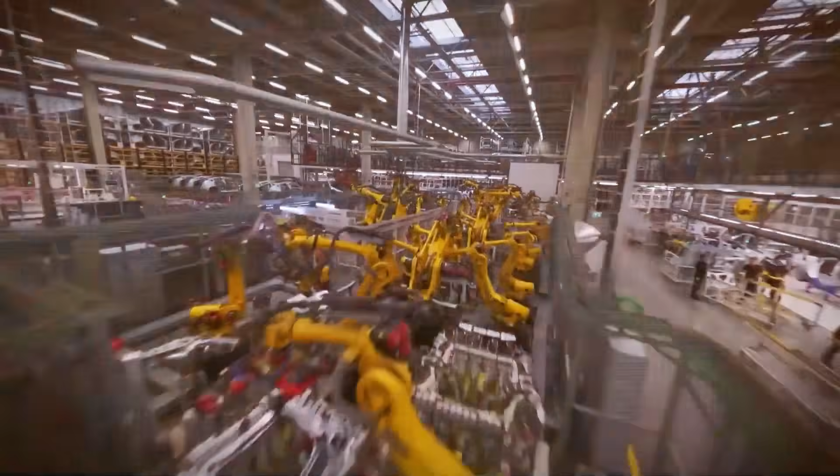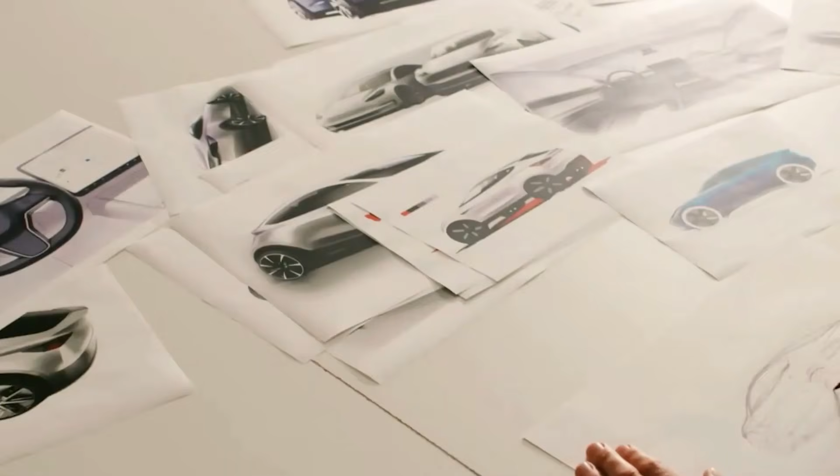It's late 2025. The legacy giants are bleeding billions, desperately trying to copy the Tesla of yesterday. They're tracing blueprints for an engine that doesn't matter anymore. Because while they were fighting for market share, Elon Musk wasn't just building a better car. He was building a machine to end the concept of a car company entirely.

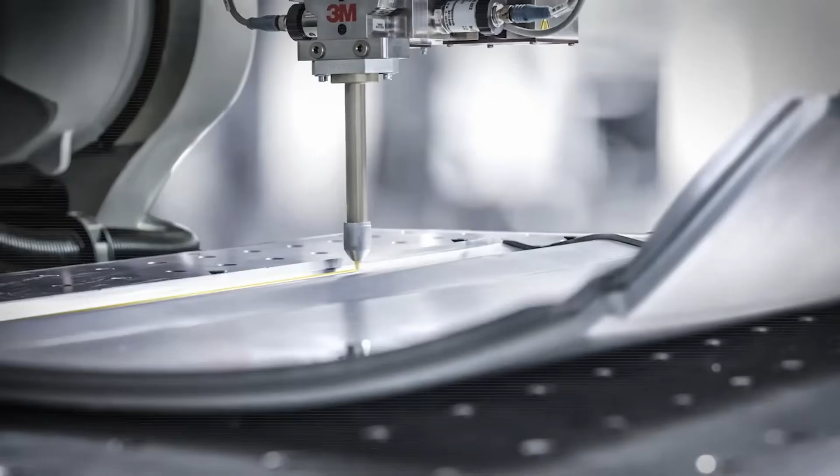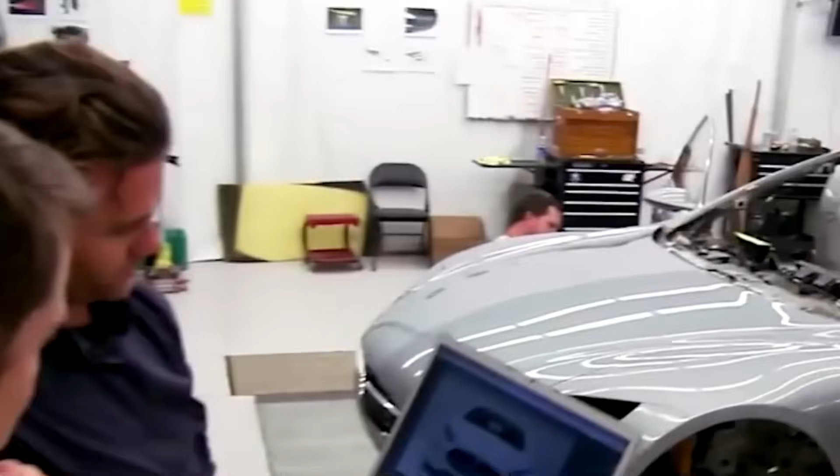We aren't talking about transportation anymore. We are talking about the total rewiring of reality. Labor, energy, the very physics of how things are made. 5 hidden technologies, 5 keys to a kingdom the competition can't even see yet. This isn't an update. This is an extinction event for the old guard. You want to survive the shift? You need to understand the blueprint.

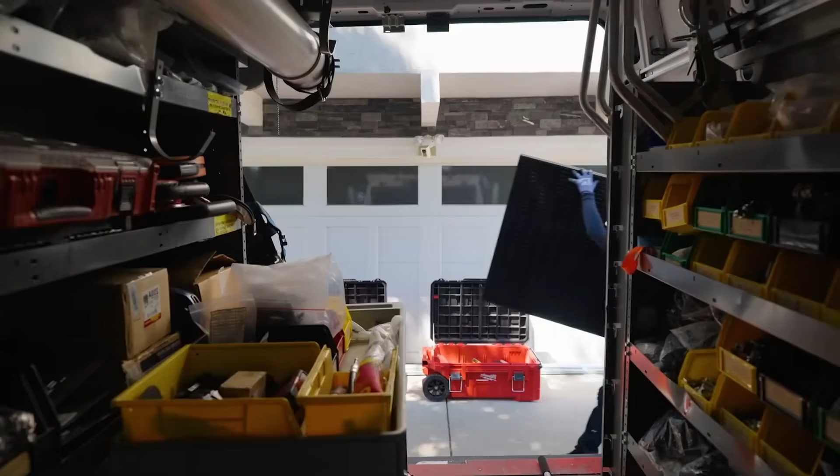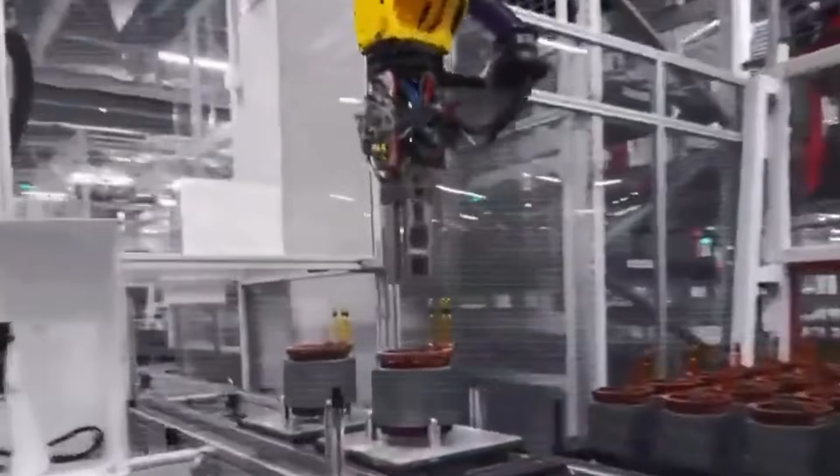Let's open the box. The playbook has 5 moves, each one a checkmate. First, the unboxed process, tearing down the century-old assembly line. Second, 48-volt architecture, a nervous system reboot. Third, the 4680 cell, the key to mass market mastery.

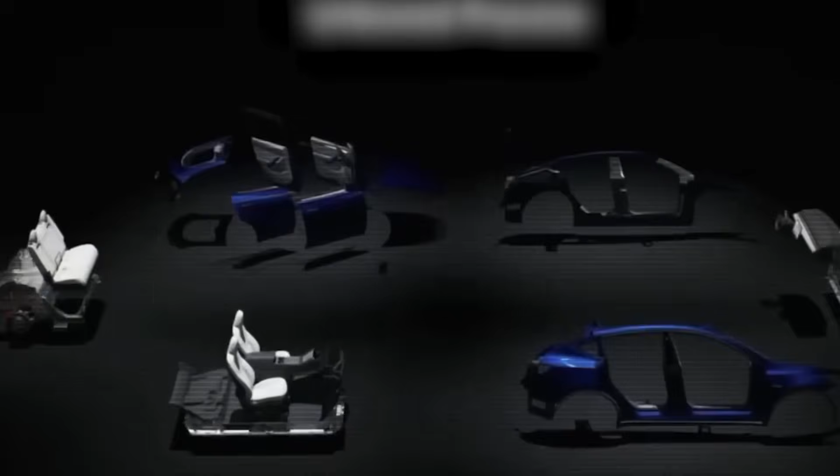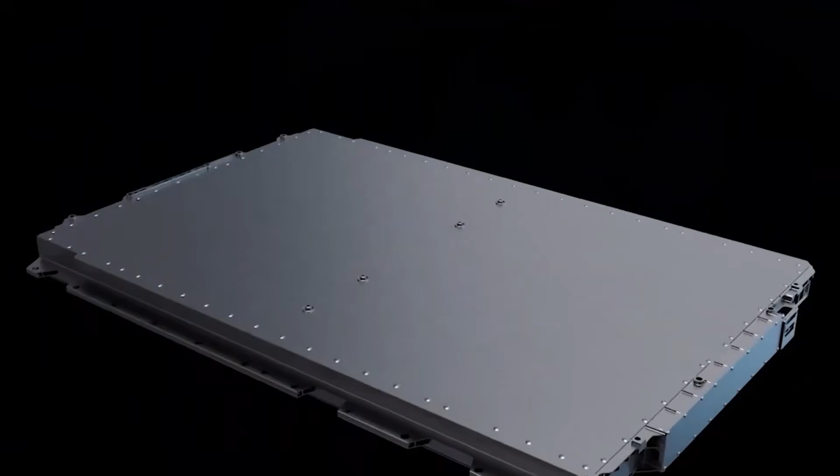Fourth, end-to-end AI, the brain that finally unlocks the robotaxi. And fifth, Optimus, the humanoid that takes that intelligence and learns to walk. Alone, they disrupt. Together, they dominate. A fortress built to secure an insurmountable lead. Today, we deconstruct the stack. How it works, why it matters, and how this convergence changes everything.

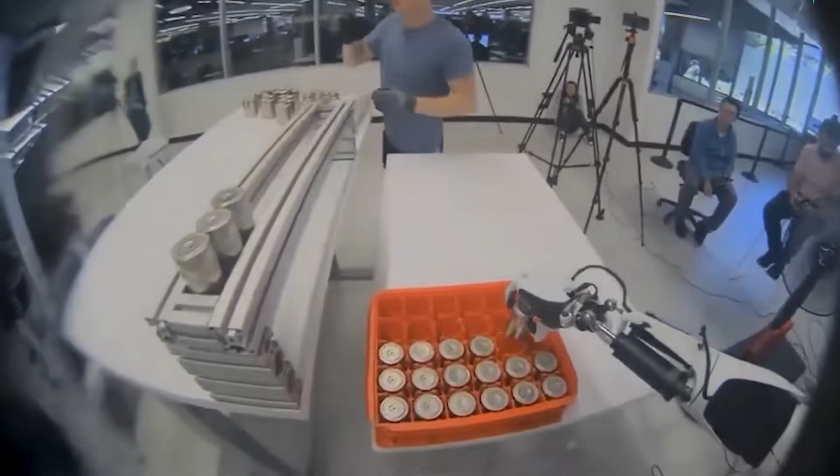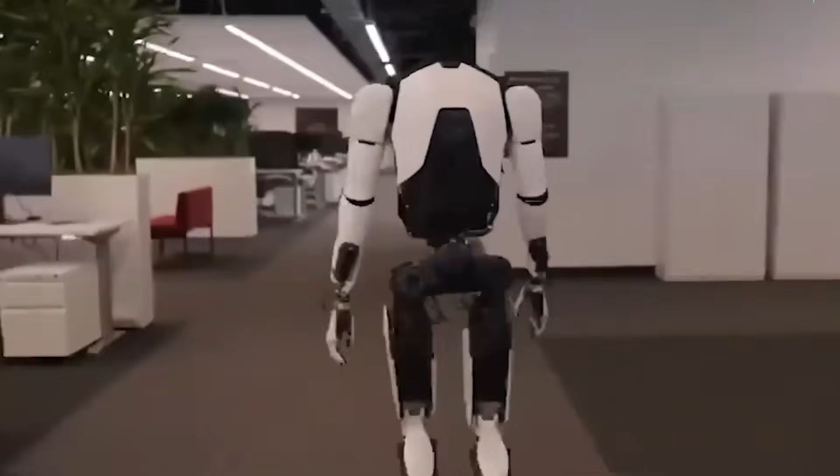Welcome to DVEXA. You need to understand the deadliest weapon in Tesla's arsenal isn't a car, it's the factory. You've heard the mantra, the machine that builds the machine. But with the next-gen platform, that vision stops being a soundbite and starts being a reality. They call it unboxed. For 100 years, Henry Ford's shadow ruled the floor.

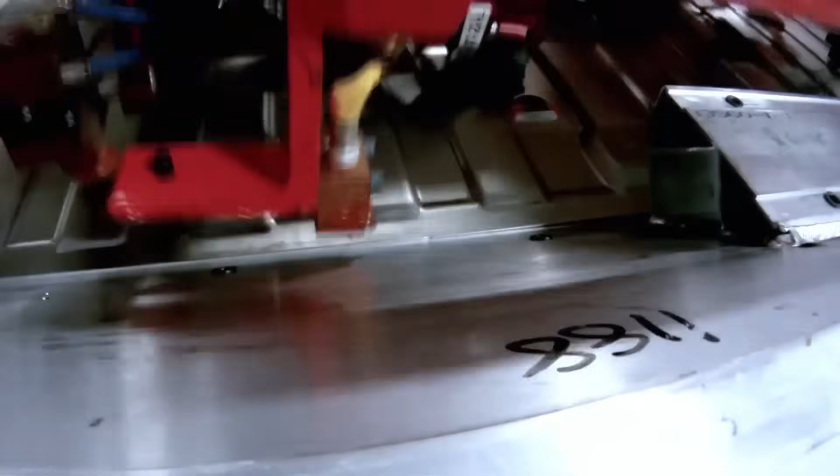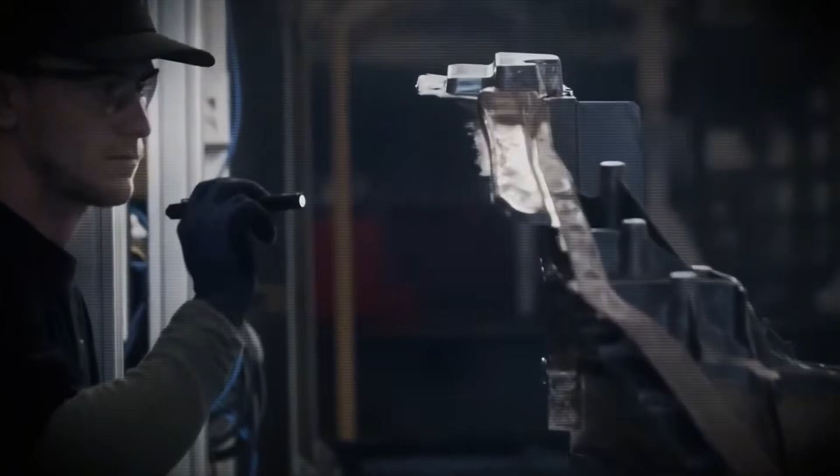The linear line, the body in white, creeping down a single track. A swarm of robots and humans performing a cramped, clumsy dance, adding parts one by one. But that rhythm is broken. Think about it. The whole line is shackled to its slowest step, a total bottleneck. Workers fighting for space, diving inside the frame, wrestling with wires. It's inflexible. Retooling is a nightmare. It's slow, it's heavy, and frankly, it's obsolete.

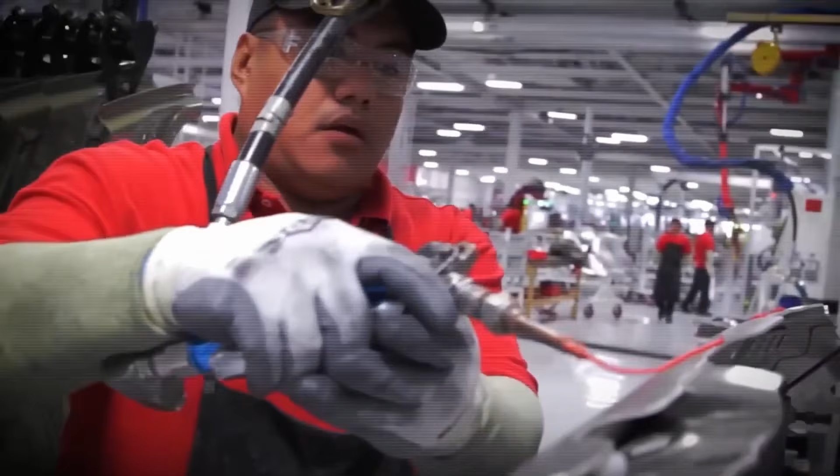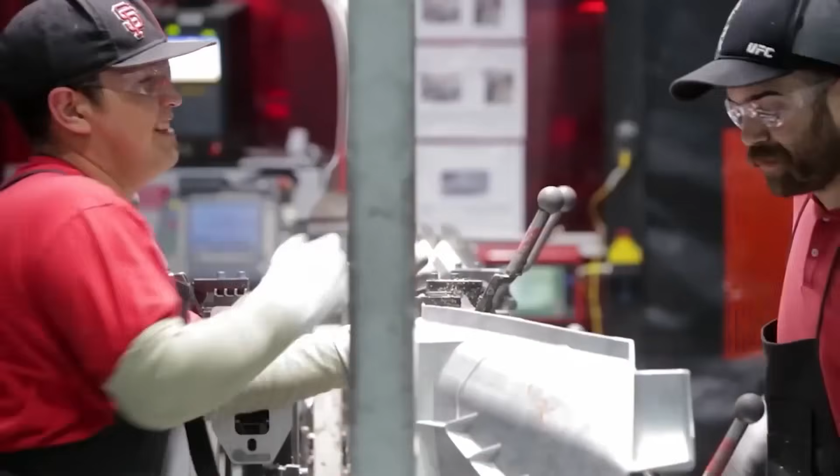So Tesla's unboxed method throws that entire 100-year-old concept in the trash. Instead of one long, slow line, the factory is organized into parallel processed chunks. Think of it like building a Lego car. You'd never build the frame first and then try to stuff the little driver through the tiny window. It's absurd. You'd build the floor, the front block, the rear block, the cabin, and then at the very end, you just click them all together. This is exactly what the unboxed process does.

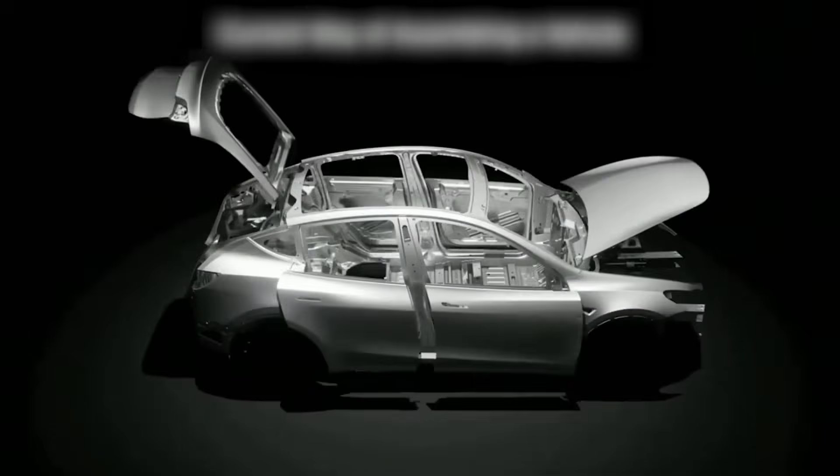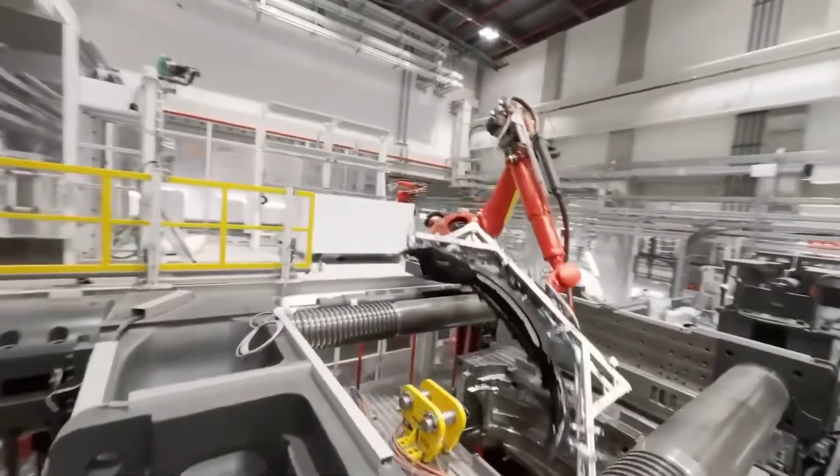Imagine this. Over in one corner of the factory, that massive front gigacasting is getting its motor, its suspension, its steering. At the exact same time, in another corner, the rear gigacasting is getting its motor. And simultaneously, the central floor pan, which is the 4680 structural battery pack, is being prepped. The real magic: open access. Workers and robots have a full 360 degrees of attack.

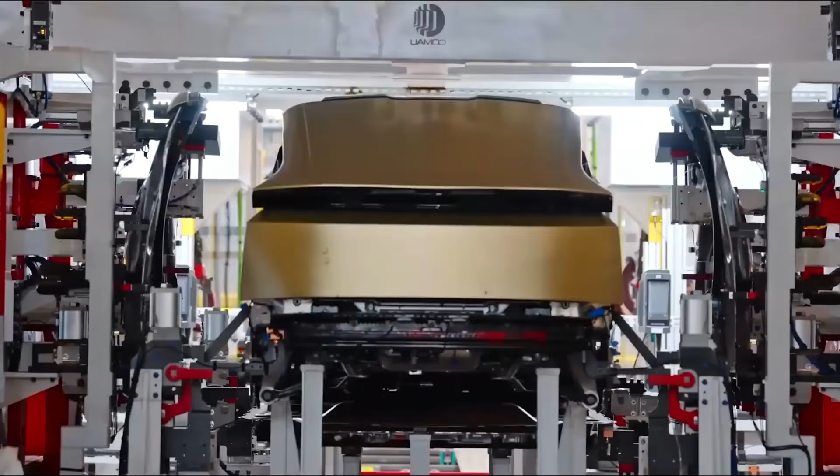You want to install a dashboard? It's simple. There's no roof. There are no doors in the way. It is massively faster. It's more ergonomic. Then and only then do these huge pre-assembled, pre-tested modules meet. The front, the rear, the painted side sections, they're all joined to that structural pack in one final step.

The results. Tesla claims a staggering 40% reduction in factory footprint, a 25 to 30% increase in production speed, all while slashing the cost to build the factory in the first place. This isn't just an improvement, it's a new paradigm.

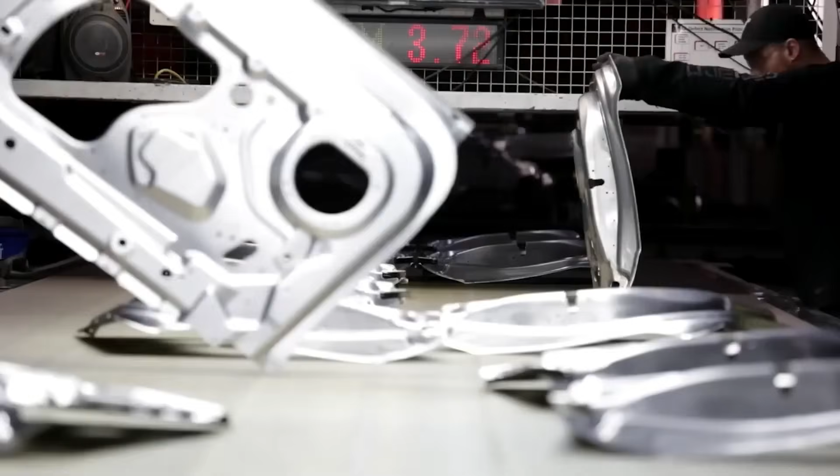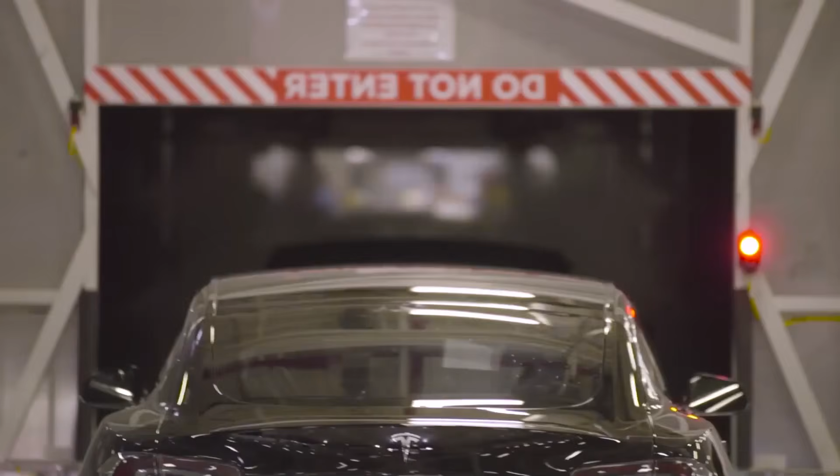This is the only way Tesla can realistically build that $25,000 car at high volume, and most importantly, at high margin. But here's the secret.

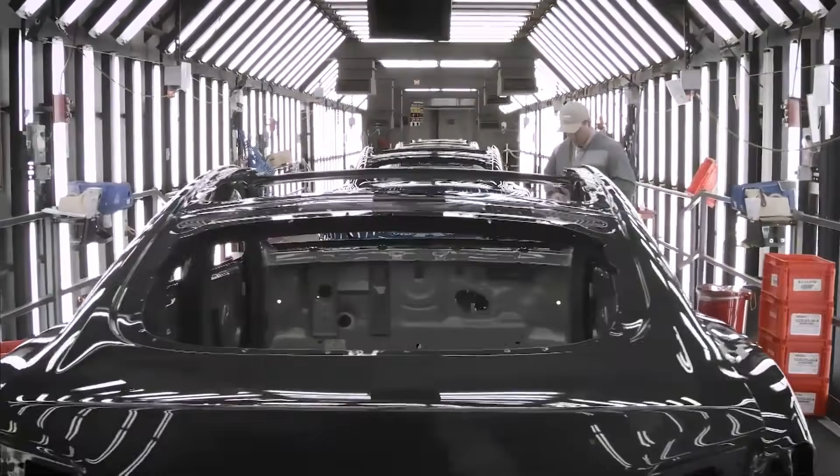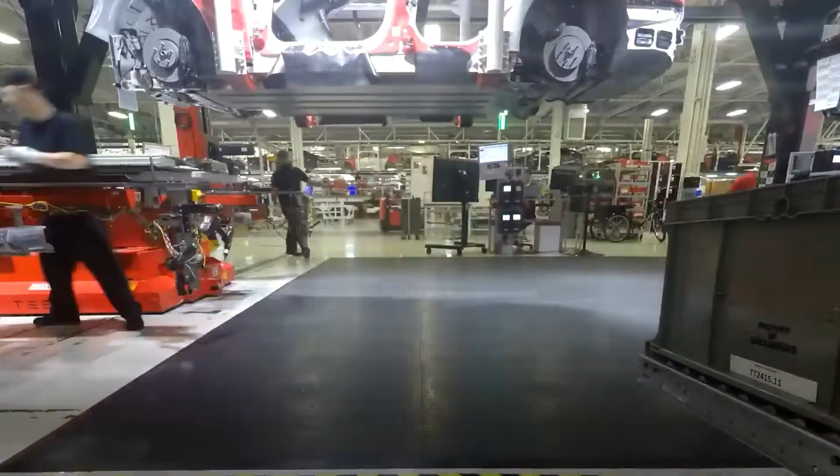That unboxed method, that whole Lego block strategy, is only possible because of another Tesla innovation: gigacasting. You have to understand, traditionally, a car's underbody is a complex puzzle. We're talking 70, 100, even more different stamped metal pieces. All of them have to be painstakingly welded together by a massive body shop of hundreds and hundreds of robots.

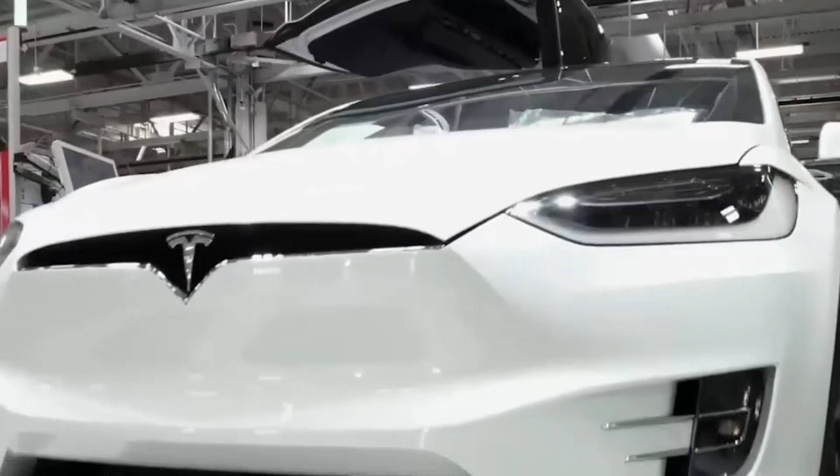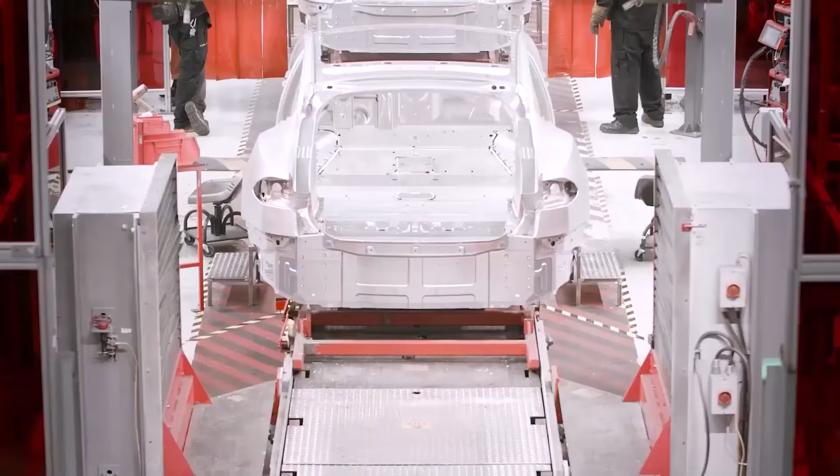Tesla's Gigapress, a machine the size of a small building, throws all that out. It casts the entire front or rear underbody as a single piece of aluminum. Just that one innovation eliminates over 300 robots. It erases 600-plus welds. It frees up a massive amount of factory space. The resulting part is stronger, it's lighter, and it is, critically, unbelievably faster and cheaper to make. That single gigapart is the Lego block that the unboxed method is built on.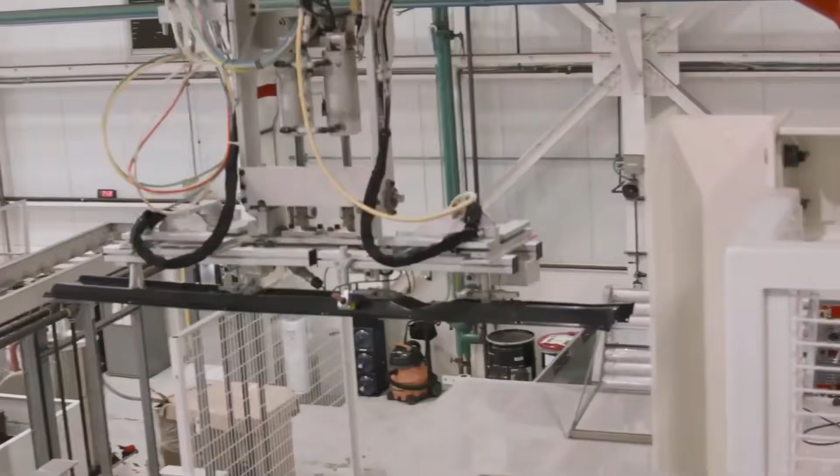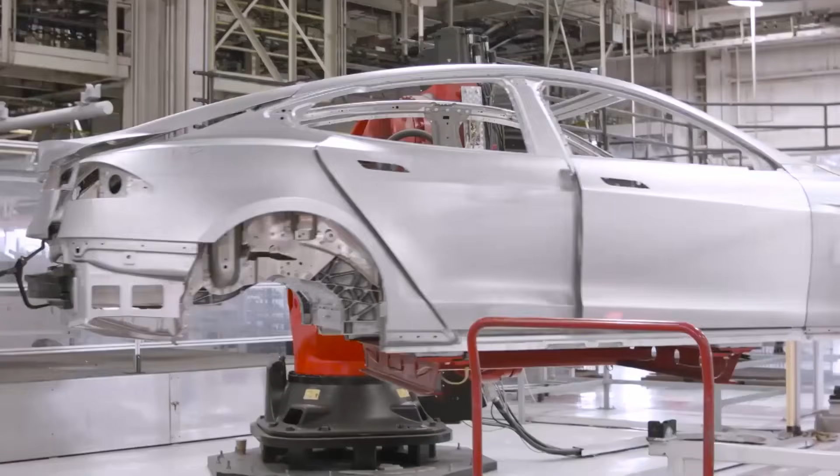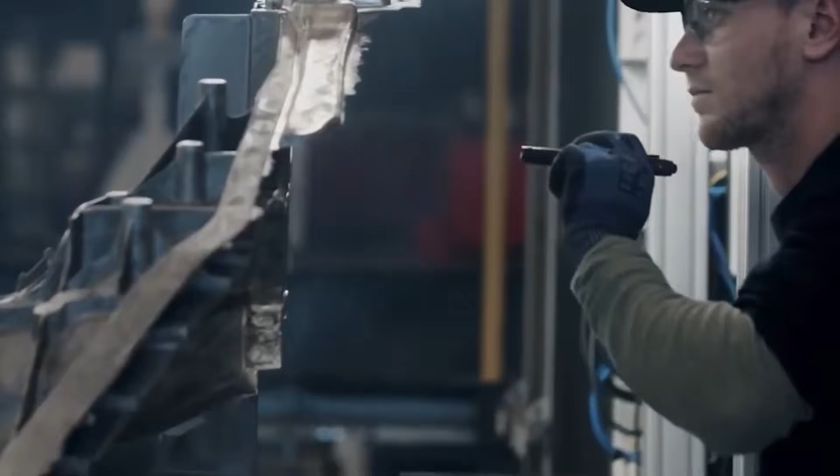While competitors are just now scrambling to order their first gigapresses, they're already years behind, because Tesla isn't just ahead in the machine. It has a multi-year lead in the metallurgy, the secret sauce: that special aluminum alloy that is strong, not brittle, and perfectly castable at high speed. That is a deep, costly moat. And for legacy automakers with their billion-dollar investments in those old-world body shops, crossing it might be impossible.

So you have the unboxed skeleton. Now you need a nervous system. And for over 60 years, the entire auto industry has been locked into a dying standard, a 12-volt system. You have to understand this. The 12-volt standard was designed for simple machines, a car with lights, a radio, and maybe power windows. But today, your car is a supercomputer on wheels. And that 12-volt system has become a critical bottleneck.

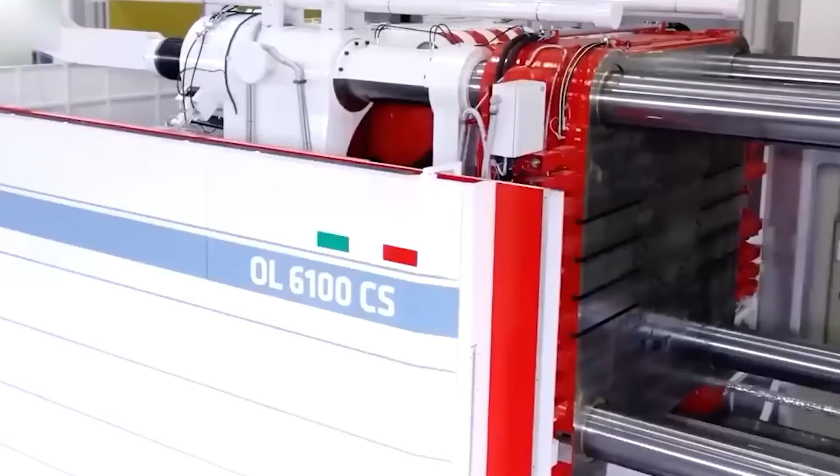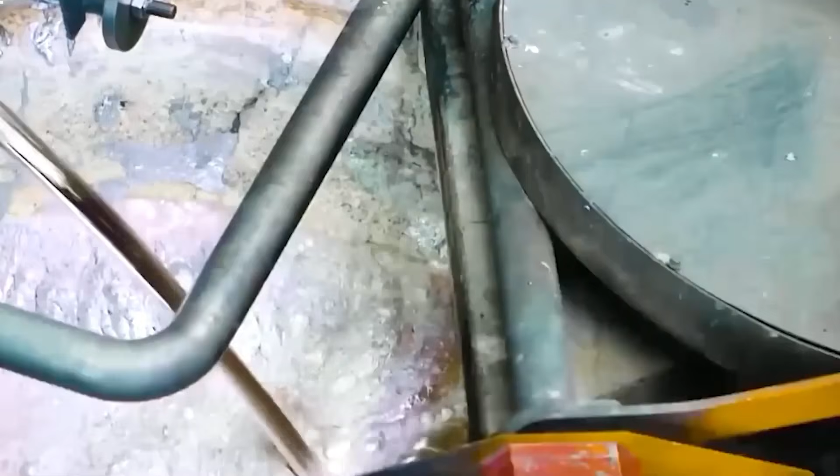The problem is just basic physics. You've heard the equation: power equals voltage times current. If you want more power, say for faster moving seats, a more powerful audio system, or the advanced steer-by-wire you see in the Cybertruck, you have to raise either the voltage or the current. And since the industry has been stuck at 12 volts, their only option was to drastically increase the current. The result: thick, heavy, expensive copper wires to manage the heat and the load.

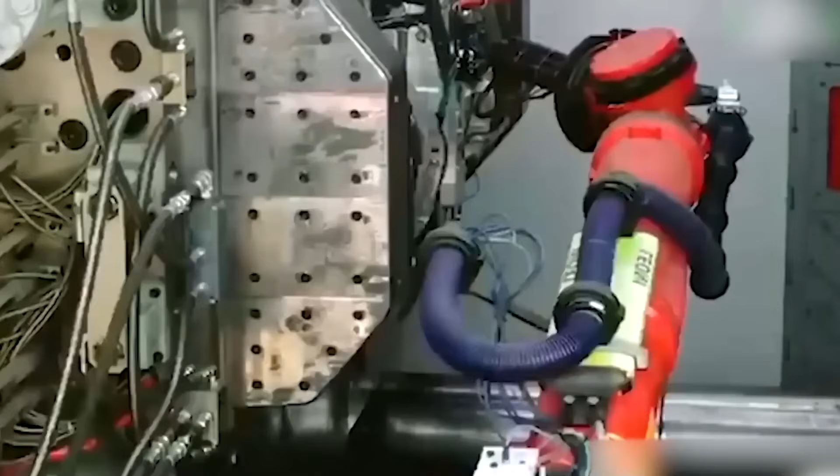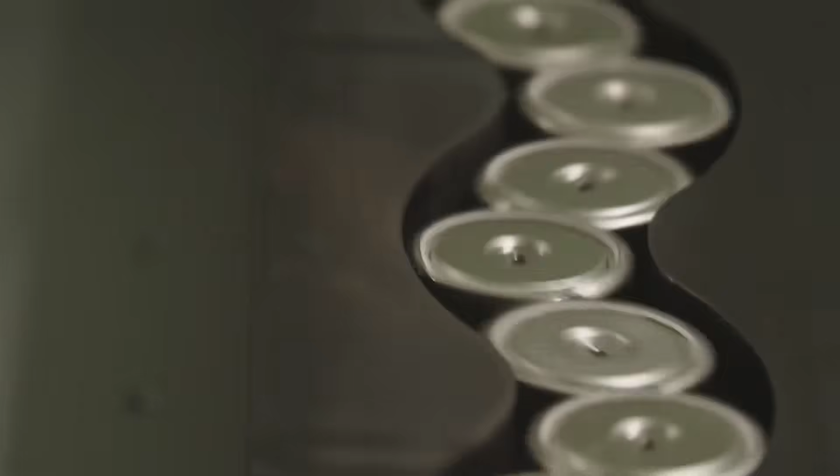We're talking about a wiring harness in a modern luxury car that can weigh over 50 kilograms. That's over 110 pounds. It's miles of copper. It's one of the most complex, costly, and manually installed parts in the entire vehicle. Worse, you hit a hard limit. You simply cannot run the high-power systems of the future on a 12-volt rail. Not efficiently, not safely. So what does Tesla do?

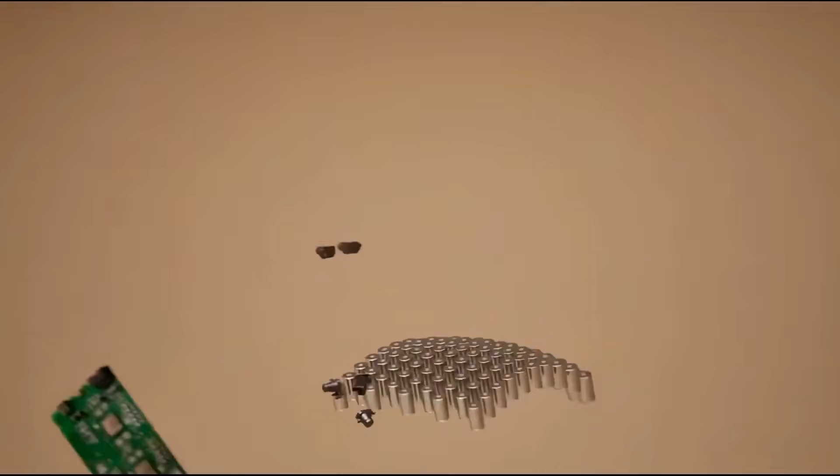They changed the equation by moving to a 48-volt system, first in the Cybertruck and now standard on their next-gen platform. They flipped the table. Think about it. To get the exact same amount of power, if you multiply the voltage by 4, you can divide the current by 4. That is a profound change. A 4 times reduction in current means you can use wires that are dramatically thinner, dramatically lighter, and dramatically cheaper. And the power you lose as heat drops by a factor of 16.

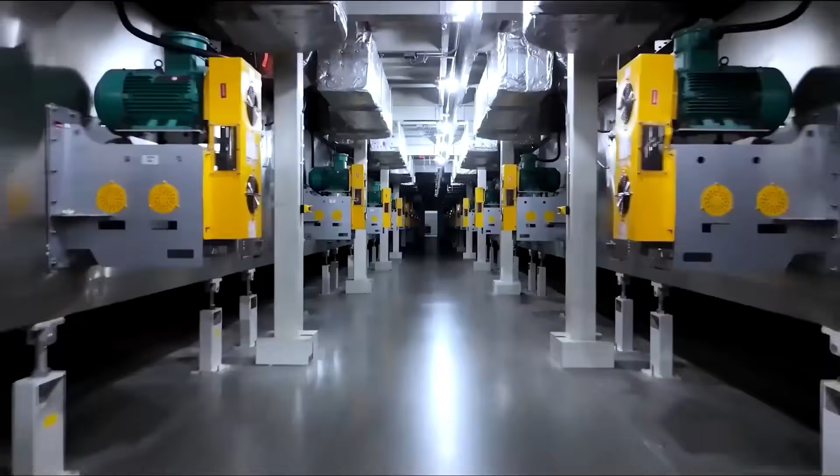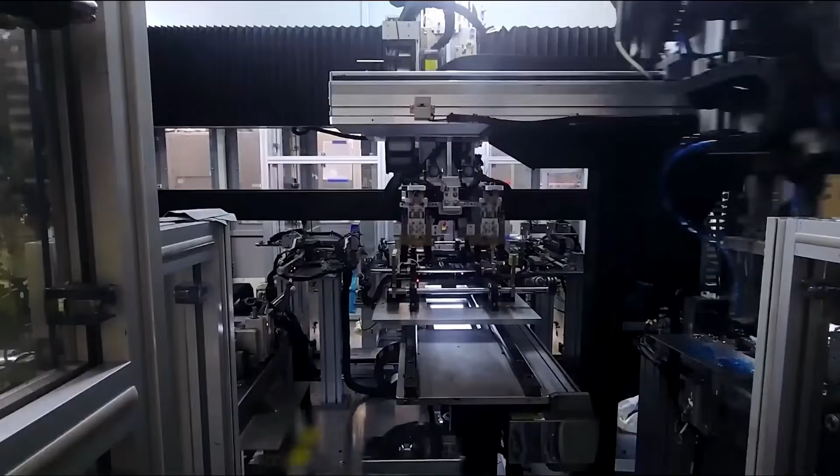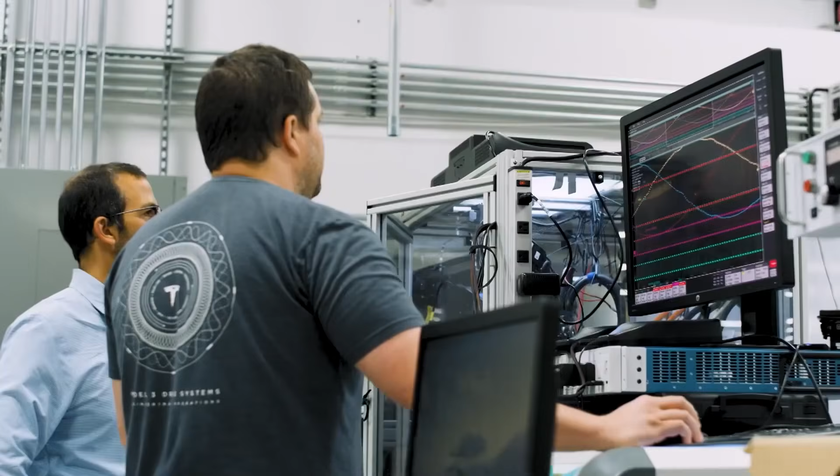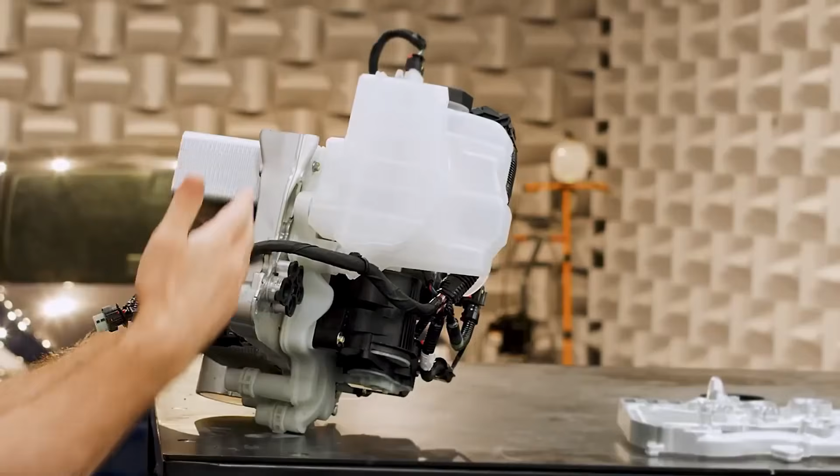The Cybertruck's wiring harness is a fraction of the size of a normal truck's. This saves money. This reduces weight, which increases range, and it massively simplifies that unboxed manufacturing process we just talked about. It's the key that unlocks the Ethernet data bus, where a single cable can finally carry both power and data, destroying the one-wire-per-function nightmare of the past.

But this is the part that should have every legacy automaker terrified.

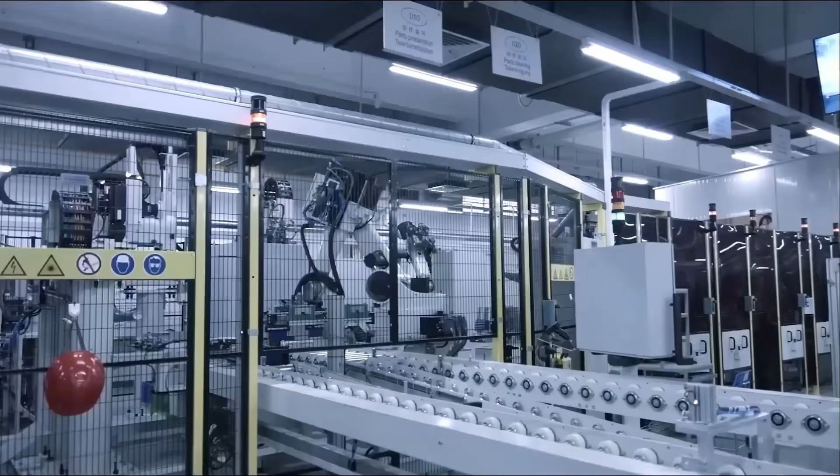This shift to 48 volts is not just an internal change. It is a shockwave to the entire global supply chain. For decades, companies like Bosch, Continental, and Denso have perfected the 12-volt world. All those window motors, the pumps, the fans, they are all 12 volts. By moving to 48 volts, Tesla is effectively making their entire parts list obsolete. Suppliers now have to re-engineer, retool, and revalidate everything.

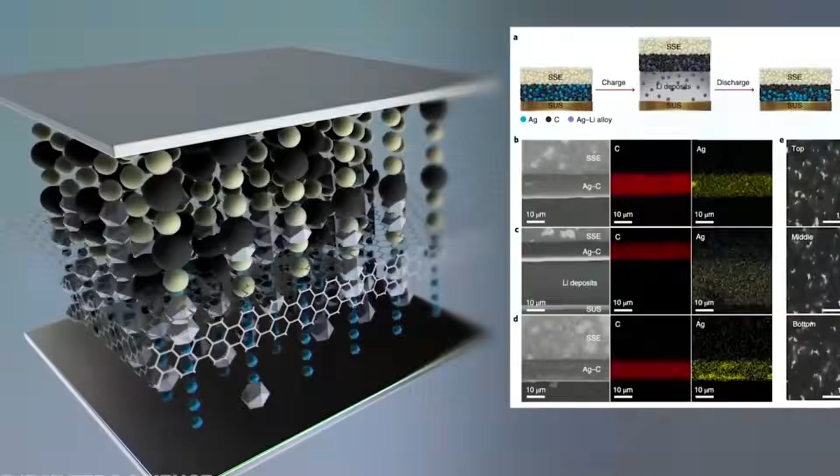A company like Ford or GM can't just switch. They are being held hostage by a supply chain that simply isn't ready. But Tesla, because they designed so many of their own controllers, their own components, can force the change. Their vertical integration lets them absorb the complexity. While their competitors are left tethered to a 60-year-old standard, this adds yet another layer to Tesla's massive manufacturing and cost advantage.

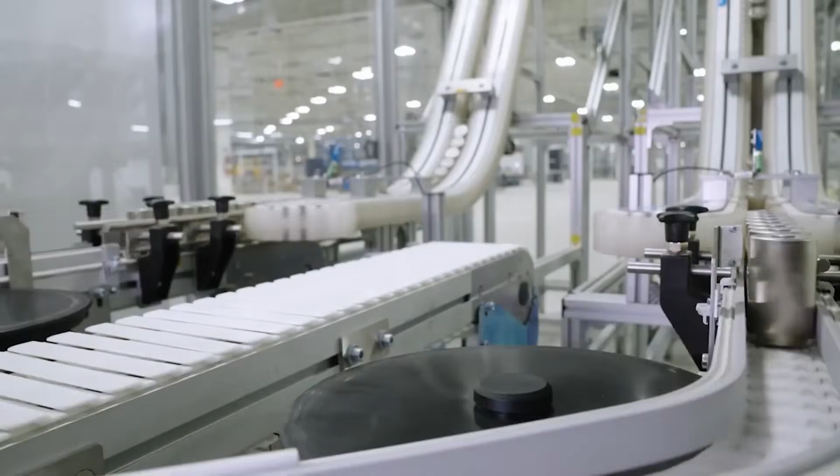So your factory is fast. Your car's nervous system is efficient, but you still have a massive problem: energy. The car still needs a breakthrough to be affordable for everyone, and that breakthrough is the 4680 battery cell. The name is just the dimensions: 46 millimeters wide, 80 millimeters tall.

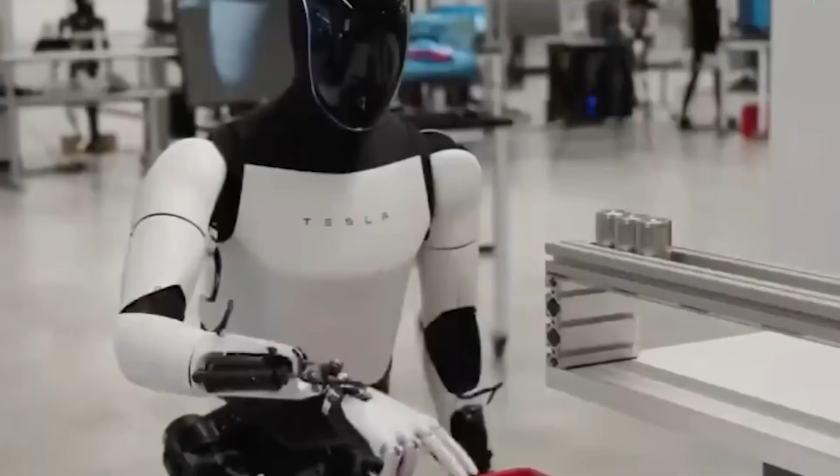But it's design that is the revolution. You see, a traditional battery like the 2170 cells in a Model 3 has two little tiny tabs at the ends. All the energy has to fight its way in and out through these two tiny bottlenecks. This creates a traffic jam. It creates massive heat, especially when you're charging fast or flooring it.

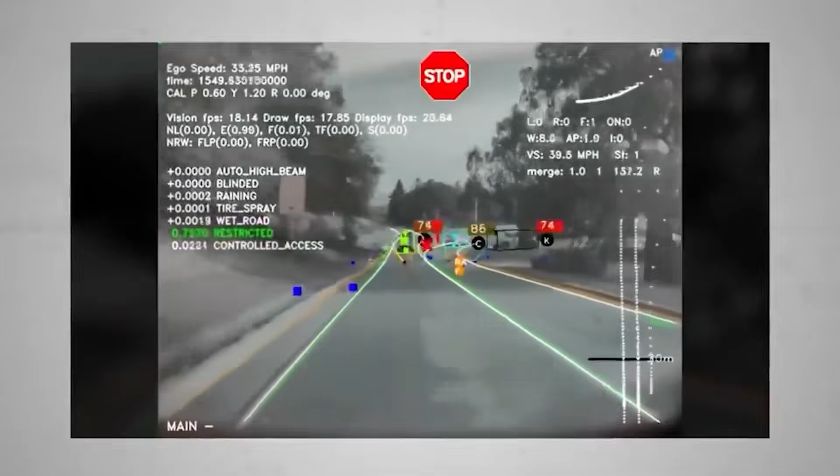The 4680's tabless design is pure genius. Instead of a tiny tab, it uses a shingled spiral. This means the entire edge of the battery's internal foil is the connection. The path for the energy is suddenly short, wide, and clear. This one change fundamentally rewrites the cell's properties.

First, less heat, drastically less. Second, faster charging. With no heat to manage, you can flood the cell with power. And third, more power instantly. This is the secret to Plaid-level acceleration. But that isn't even the real story.

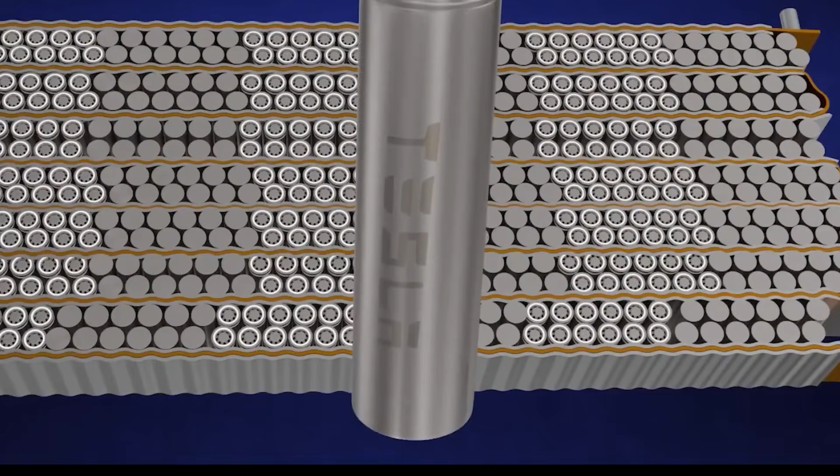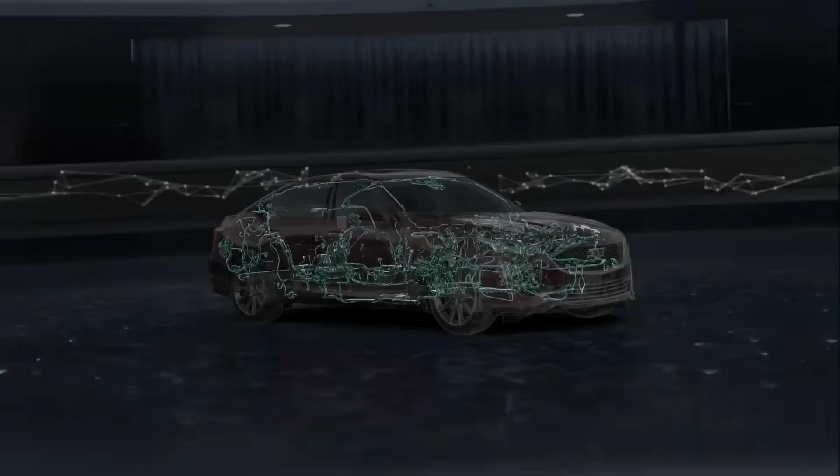The manufacturing is the true change-everything moment. It's a process called dry battery electrode, or DBE. For 50 years, everyone has made batteries the same way: a wet slurry. You mix the battery materials into a toxic wet paste. You paint it onto a foil, and then you run it through massive 100-meter-long energy-blasting ovens to dry it out. Tesla's DBE process stamps the active material dry directly onto the foil. No solvent, no water, no drying.

Now, you need to understand how impossibly difficult this is. It is the holy grail of battery manufacturing. It's the main reason the 4680 ramp-up was so slow. The old wet method is like painting a wall. It's slow, but the paint spreads evenly. The dry method is like trying to spread a layer of fine dust perfectly evenly on a wall, make it stick, and do it at lightning speed. It's like trying to compress fine gravel into a perfect mirror.

And as of 2025, Giga Texas is finally scaling it. This process doesn't just promise to cut factory footprint and energy use by 10 times. Internal reports are already clear. The 4680 cell is already cheaper for Tesla to make than anything they can buy from suppliers.

This is the final piece of the puzzle. You combine this cheap, powerful cell with a structural pack where the battery is the floor of the car, saving 370 parts, and you have the key. This is the only way the $25,000 car is possible. It's the only way the Tesla Semi works. So the 4680 cell is the heart.

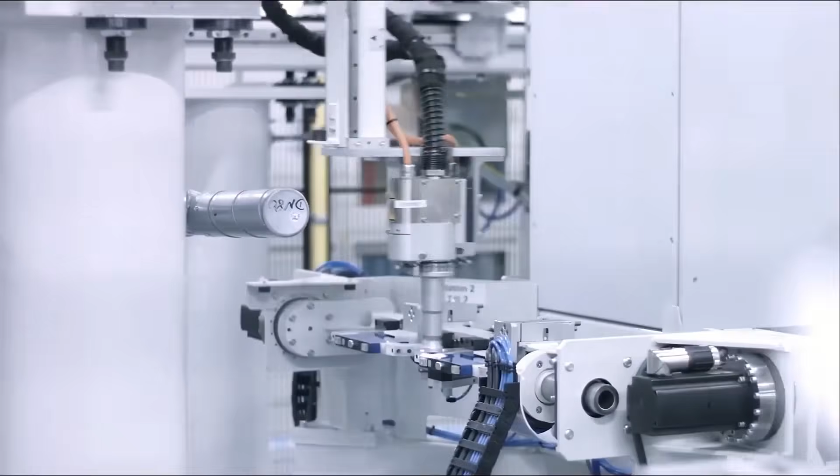But now we talk about the brain, full self-driving. For years, FSD has been this promising, controversial, coming-soon beta. But with version 12, it went through a change as fundamental as the jump from a flip phone to a smartphone. You see, the old way, FSD 11 and everything before, was a mountain of code. It was a complex, human-written stack, hundreds of thousands of lines of C++, a giant, fragile rulebook.

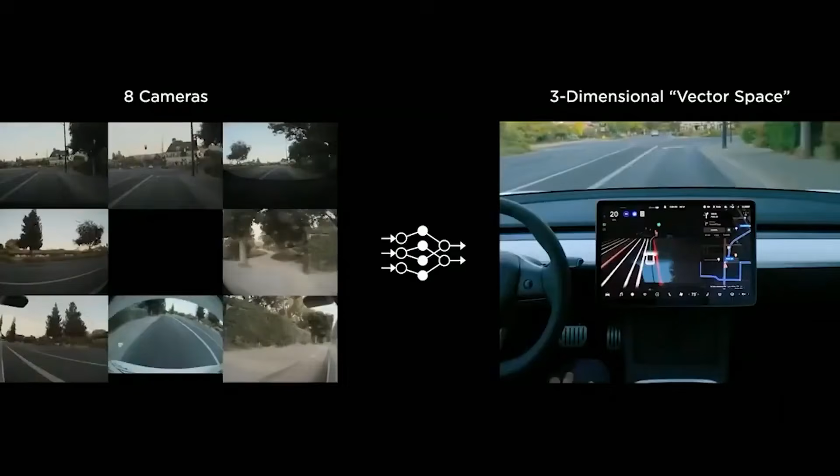If the camera sees a red light, then apply the brake. If a car is merging, then calculate its trajectory. If it's a stop sign but there's a pedestrian and the cross traffic is clear. This approach is brittle. It's impossible for a human to write a rule for every edge case the real world can throw at you. A stop sign hidden by a tree, a construction worker waving you through a red light. This is why true self-driving has been almost solved for a decade.

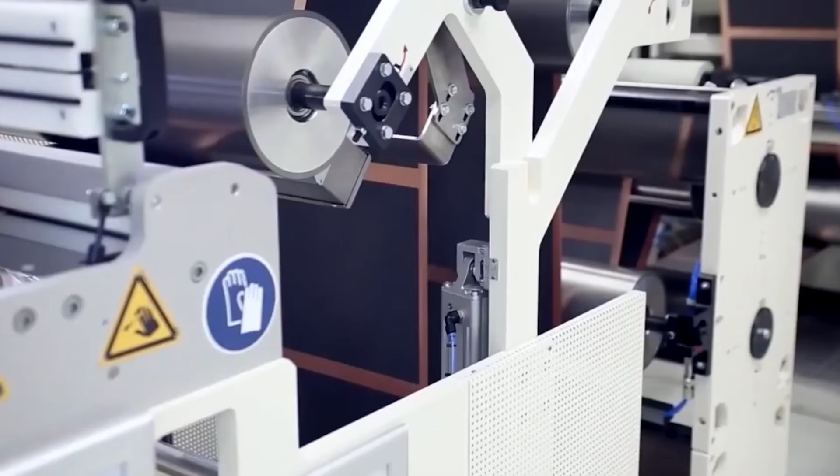So with FSD V12, Tesla did the unthinkable. They deleted it. They deleted over 300,000 lines of that C++ code, and they replaced it with a single end-to-end neural network. This new system was not programmed, it was trained. Tesla fed it millions of video clips of its best human drivers and essentially told the AI, "Watch this, learn to drive like this," and it did.

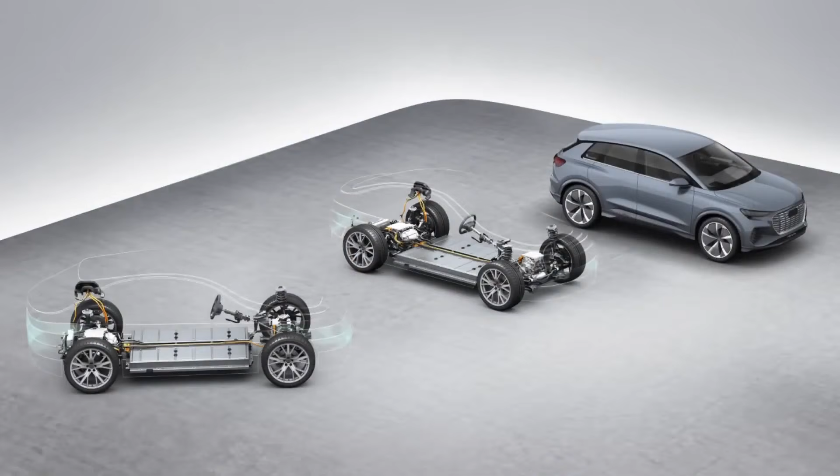Now the system takes in raw video from the cameras and outputs steering, acceleration and braking commands. Photons in, controls out. This is the ChatGPT moment for physical AI. The AI is predicting the next most likely driving action based on all the video it has ever seen. It learned how to creep at an unprotected left turn by observing humans do it, not by reading a rule.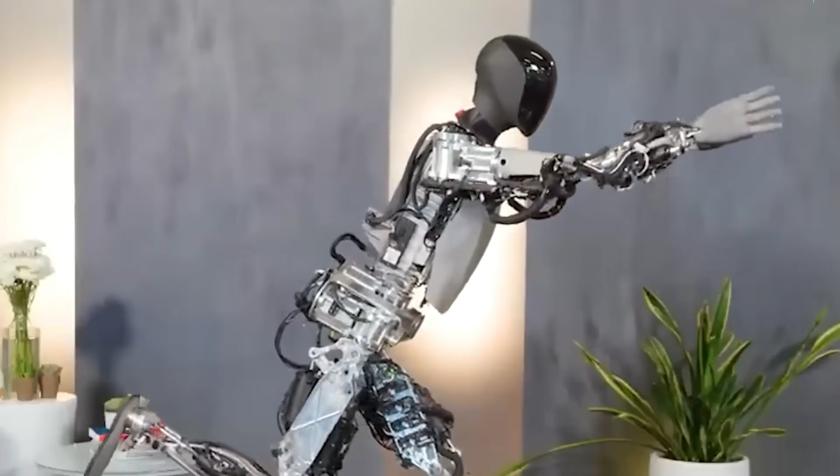And this system is infinitely scalable. To make it smarter, you don't hire 1,000 engineers to write more if-then rules. You just curate new tricky video scenarios, add them to the training set, and recompile the brain.

But an AI is only as good as the data it's fed and the computer that feeds it. First, the data. With over 6 million FSD-capable cars on the road, Tesla has the largest data gathering operation in history. When a driver takes over, the system flags that video clip, that difficult snowy left turn, and uploads it to the data factory. Second, the computer.

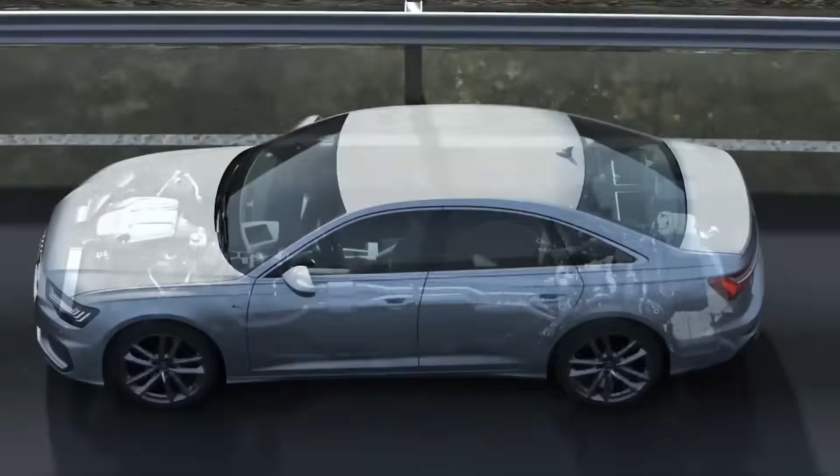They are building their new training supercomputer, what you could call Dojo 3, out of the same powerful chips that will be in their future cars. This creates the ultimate flywheel, a doom loop for competitors. Better AI leads to a better FSD. More people use it. More data is collected, the AI gets better faster. And their new unified computer spins this flywheel at a speed and a cost no one else can match.

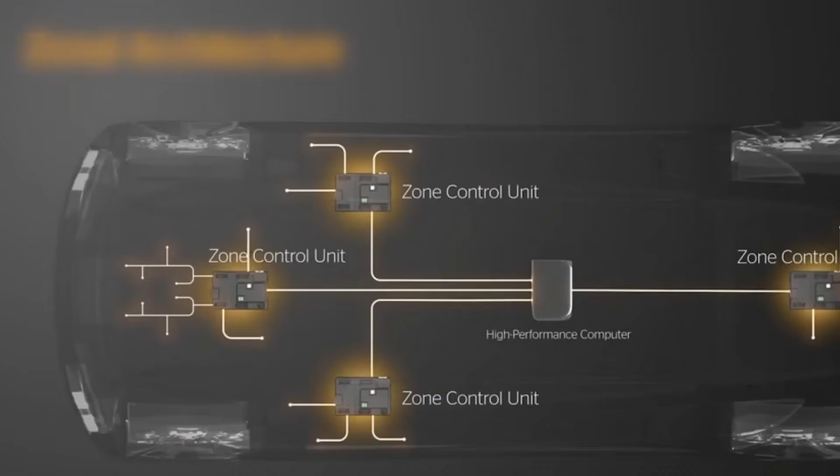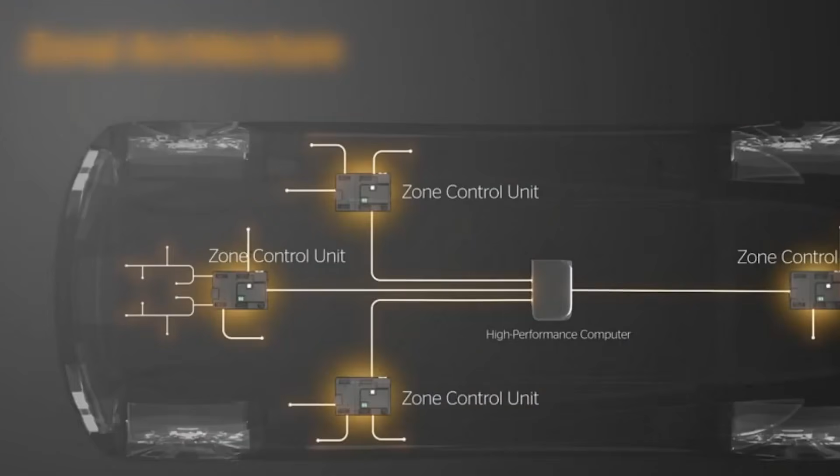This is the only path that plausibly solves full autonomy. And when it does, it unlocks the single most disruptive economic force of all, the robo-taxi. A $25,000 car that can drive itself 24/7 and earn $30,000 a year. That isn't a car anymore. It's an asset, and it's one that will change our cities and our world forever.

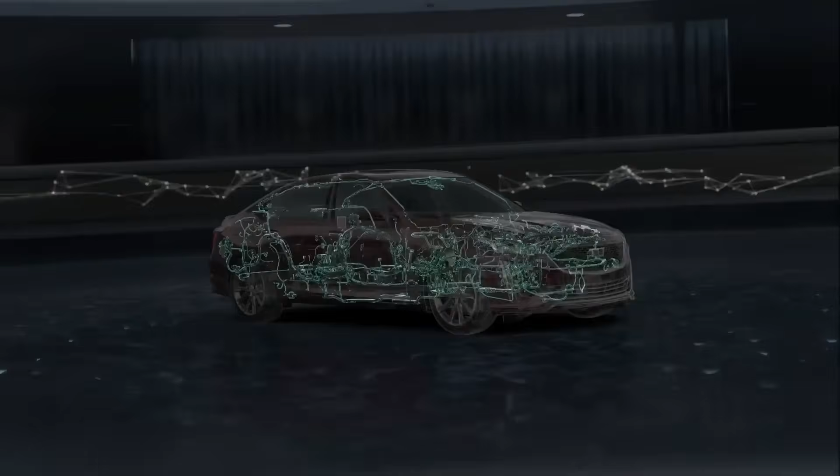Think about it. The brain: Optimus runs the exact same neural net as the fleet. The AI that learned to survive a chaotic street can easily master the factory floor. It just swaps car physics for human physics. Walking, balancing, grasping. The power: it runs on the 4680 architecture. The manufacturing: it's built with the same unboxed, Giga-casted principles.

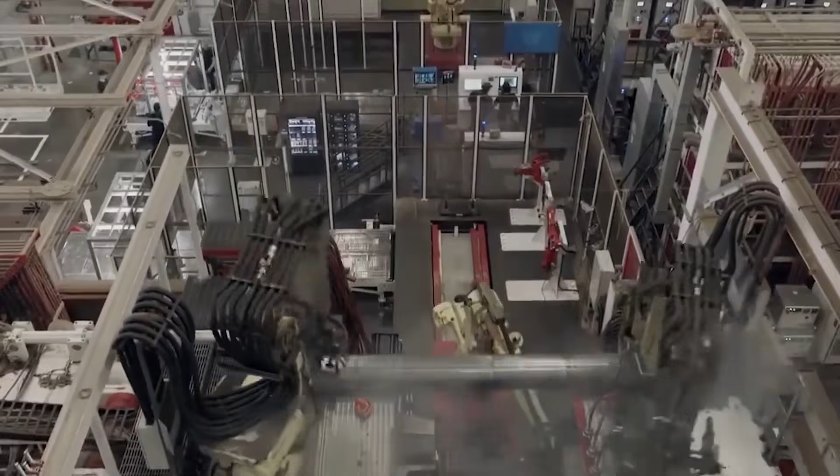And the progress is staggering. Gen 1 could barely stand. But Gen 2.5, it has hands so tactile, so precise, they can handle an egg without breaking the shell. And this isn't a simulation. These bots are in the factory right now, taking the jobs that are boring, unsafe, or repetitive. But that's just the start.

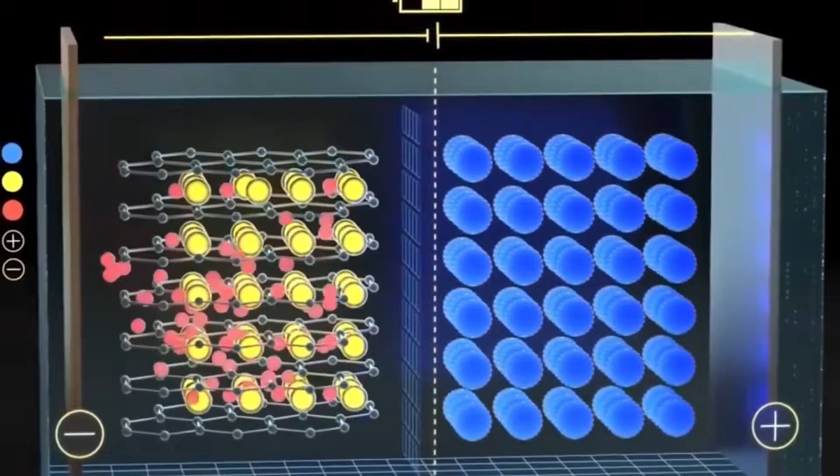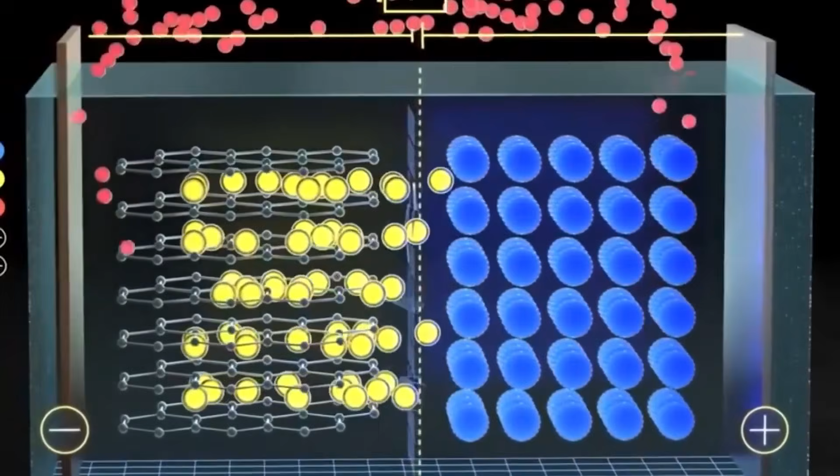You might ask, why a complex humanoid? Why not just put it on wheels? The answer reveals the true scale of the ambition. Because the world isn't built for wheels, it's built for us. Our stairs, our doors, our tools. They're designed for 2 legs, 2 arms, and 5 fingers. A specialized robot is stuck in one place. But a humanoid like Optimus can work in any space.

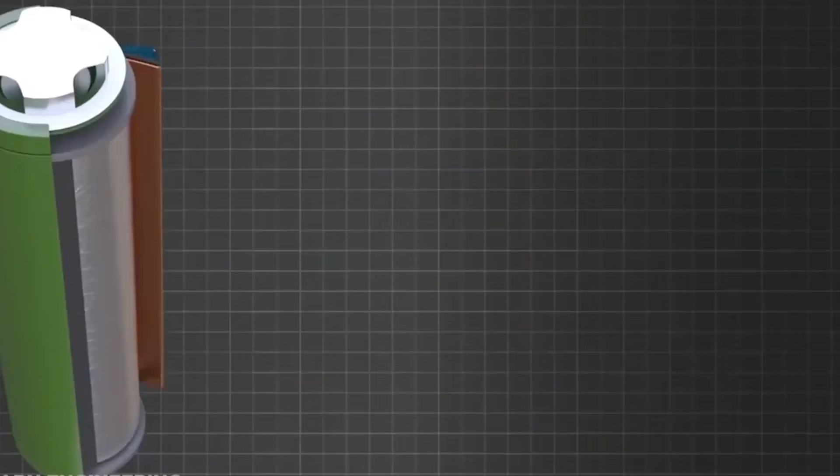It can install a door today, stack boxes tonight, and go home to wash your dishes by the morning light. You don't redesign the world for the bot. The bot fits into the world you've got. This isn't just a new product. It is an entirely new programmable labor force with a potential demand of 20 billion units. This is an economic shift, larger than the car, the PC, and the internet combined.